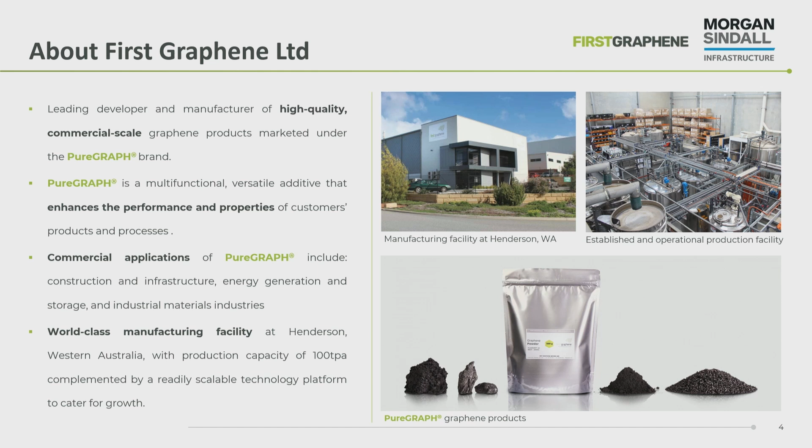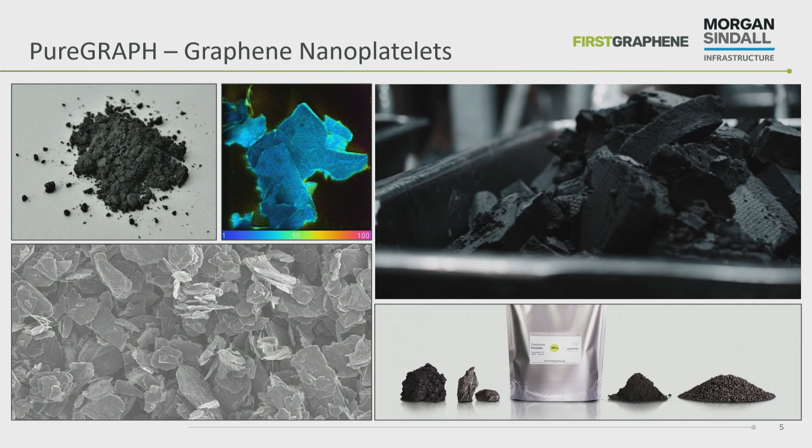It's a microscopic platelet, very, very thin, but with very large aspect ratios. That colored image is just showing you that it's mainly carbon - there's some oxygen functionality on the edges. This is the material that can go into all these applications and give you multiple benefits. That's my R&D manager, Ian, handling the graphene there - you can see we're doing it at a pretty large scale for graphene.

These are some of the benefits. The ones most relevant for cement and concrete are that it's strong, that it's small, and that it can provide a nucleation site during cement hydration, though that's not listed here. It's also a very small nanomaterial, very strong - the tensile strength is very high - and it's totally impenetrable, even to things like hydrogen or helium. It can't pass through it.

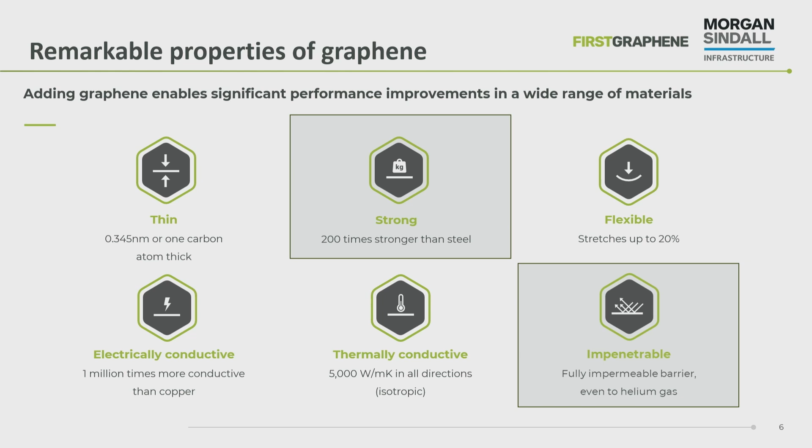That means it's a very good water barrier, a very good ion barrier, and it can impart the properties of graphene - the very high strength - onto the cement matrix. That's what we're really trying to improve in the concrete, the strength of the cement paste - nothing really to do with the aggregates, but just enhancing that cement paste and its cure.

Graphene's been talked about for 20 years now. The Nobel Prize was won in 2010 for graphene. So why are there so few applications where graphene's actually used at scale? This is just to give you a bit of an overview of why it's so difficult.

Graphite is the most thermodynamically favorable form of carbon, so it wants to restack into graphite. All these graphene layers want to restack and form graphite. So when you get graphene and make a product out of it, or sell it like we do in a paste or solid form, it wants to restack like the image on the top left - it wants to form these graphitic lumps, and they're no good, that's useless.

That's just like putting graphite into your mix. There's no point in doing it. If anything, it might make it weaker. The graphite will cleave along those planes, and you'll actually make it weaker.

So we want to make it more like D, where the cement is bonded directly to the platelets. That strength is imparted onto the cement paste, and the tensile strength of the graphene platelets brings a benefit to the hydrated cement.

Doing this is very difficult, and it's difficult to supply a product which is stable. It's a formulation issue, really, that you've got to supply something stable and in those single platelet forms, which is suitable for all applications. And that falls to us, really, as the graphene supplier, to work on these different formulations and make sure our graphene is applicable to whatever end goal we're trying to achieve, whether it's polymers or cement and concrete.

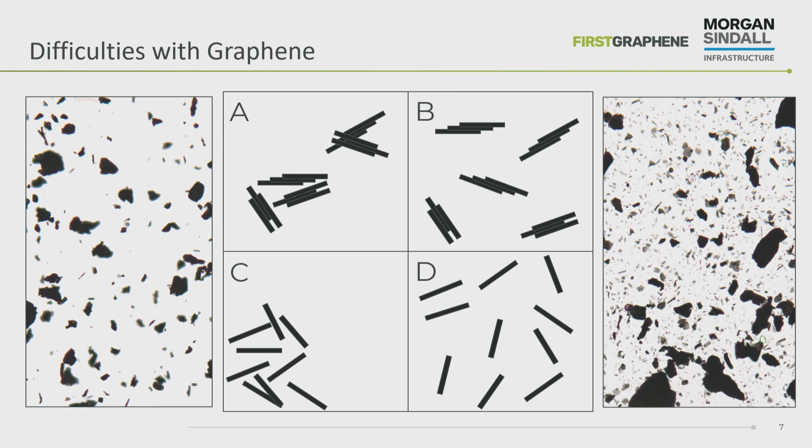The microscope images there on the left and on the right show you the difference between a well-dispersed graphene mixture, which is active, and all those small platelets are active and accessible, and the one on the left, which is all in that graphitic sort of form. There's no free platelets there to bond into and provide you the strength.

So this was the main bulk of the project. This was a Transforming Foundation Industries project. The aim was to try and get graphene into cement and then into a slab. And those are just images of the process there.

So we took our graphene, we mixed it into the grinding aid. Really, that was the key point in the project: how do we get the graphene into the cement plant? Usually when you've got graphene, you need a liquid addition point, so you need to get it well dispersed before it goes into the cement plant.

And there's only really one point to do that. You can put it into the water, which is sprayed into the cement mills, but there's also existing grinding aids which are used inside the mills. So we thought that is really the only point in the cement production process where liquid additives are used. So we need to target that point, get the graphene into that grinding aid, disperse it well, and immediately dose it into the mills.

You can see here that on that middle right image, that's one of the mills at Breedon Cement Plant, and that was our little gazebo there where we did our dispersion process. I'll show you inside the gazebo, there's nothing secret there. So we added that grinding aid, we dispersed it, dosed it straight onto the belt, and it went into the mill.

And from that point on, it was just like a regular cement. So no one down the supply chain had to worry that there was graphene in that cement. They just treated it as normal. There was nothing unusual happening there.

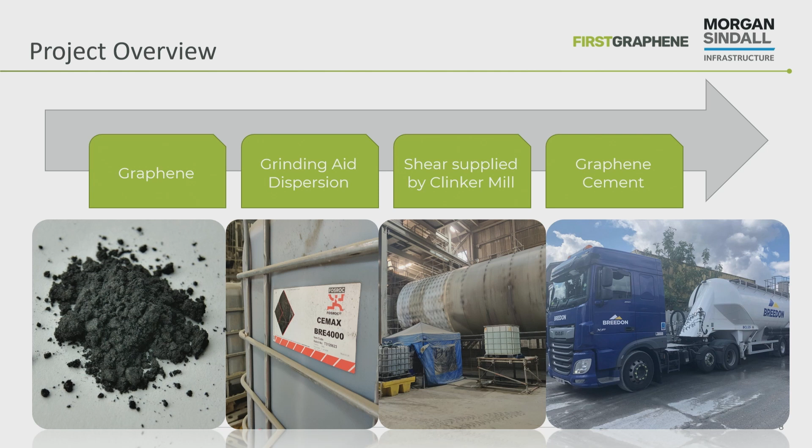So we worked with the University of Manchester. They were looking after the lab activity. They were looking at the CO2 footprint of the cement and of the graphene and of the mixture. They were looking at the health and safety aspects of having a nanomaterial in the cement, something that's not been done before.

Breedon were in charge of the cement production and the logistics and getting it to the batching site, and then Morgan Sindall were in charge of looking after the concrete batching and pouring it into the slab, which you'll see some images of.

So this is the dispersion process. All that effort that goes into getting these platelets active and in that grinding aid went through this process. So we started with our standard graphene powder. We passed it through a high pressure homogenizer, which is used in milk processing or emulsification processes where you want to mix oils and water.

And we passed it through that process, and what that does is it's a very tiny aperture in that mixer, and you apply about 1,000 bars of pressure to it, and as it goes through that tiny aperture, there's huge shear forces in there, and all those graphitic lumps get dispersed, and then you form your nice individual graphene platelets, and they're dispersed into the grinding aid.

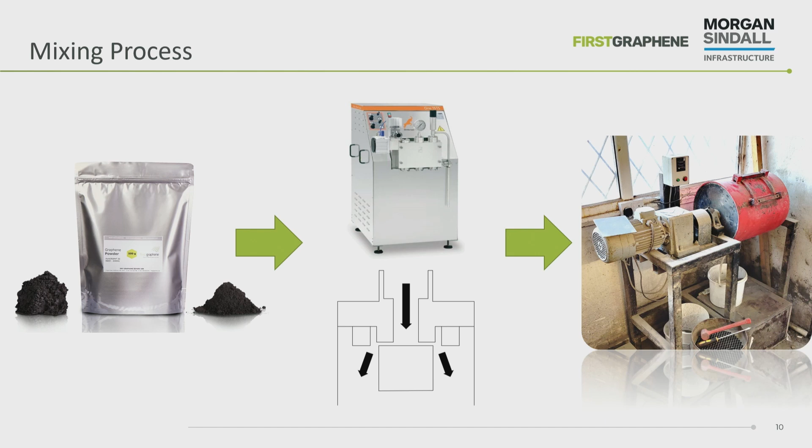We then went on and did lab testing in these small-scale cement mills. So you can see there the grinding aid, that's that black paste there with all the dispersed platelets.

Once you start to disperse the graphene, it has a very high surface area. So even low loadings of graphene in a dispersion will cause it to really increase in viscosity as that surface area is exposed. That's it in there with all the additives, the clinker and the gypsum and the limestone.

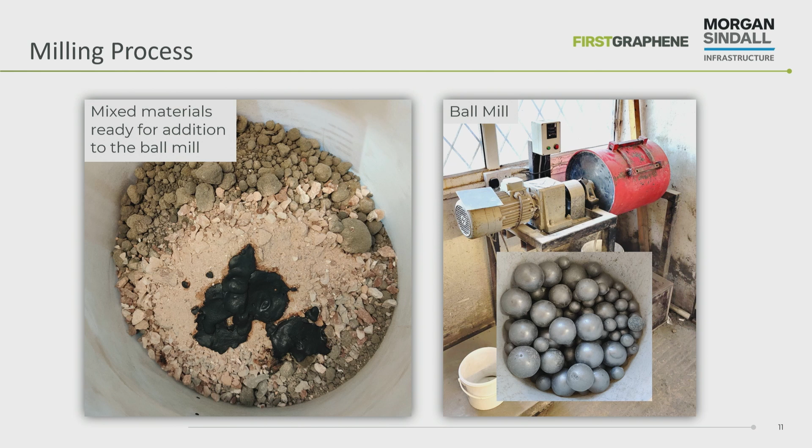We passed it through the ball mills. I won't show you all the data, but there is some, we saw decent trends in the data. So at early ages, you can see here where we're looking at firstly, the graphene loading on the left.

So how can we optimize for graphene loading? You can see it goes up there. So you add graphene, and then it reaches an optimum.

We found this in literature as well with our materials. We've done a lot of work with Australian academics, and they also found that this optimum occurs. So at 0.06, 0.07%, at very low loadings, you start to see a peak in performance.

And then when you add any more graphene, it starts to drop down again. So it could be something to do with the nucleation efficiency of the graphene. It could be something to do with there's too many agglomerates still in there, there's too many graphitic-like particles, and then that causes a decrease. So we always see this hump at very low loadings.

We also looked at the effect of the grinding aid. The grinding aid is just like a liquid, it's very low viscosity, like water. So when we added graphene into that and then dispersed it, the viscosity shot right up.

So we had to add some extra water to get that flowable again, because it had to pass through existing equipment on the Breedon cement plant. That's the one thing we wanted to do, is use as much existing equipment inside the cement plant as possible. So we were doing this dispersion, but then the viscosity shot right up, so we had to add some extra water to keep it flowable.

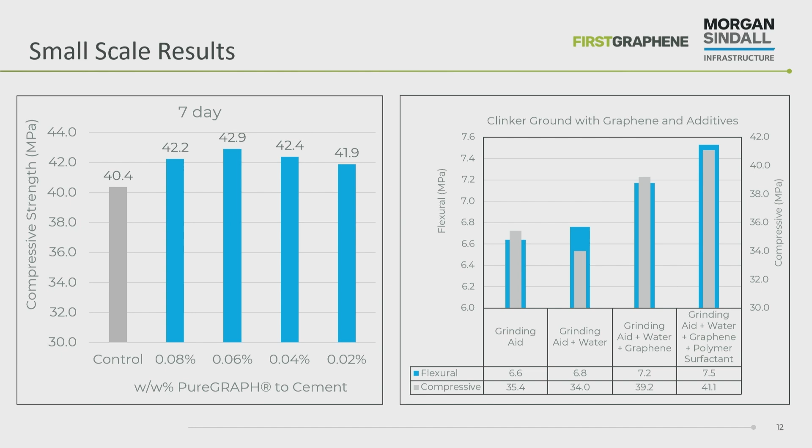So why is there an improvement at all? Really, it's all about, we did some in-depth investigations into the cement paste. So we took graphene and cement and water, and that's it. That's all that's in these samples.

This was just a CEM1, so we wanted to see what the effects of clinker hydration and graphene had on the hydrated area of these images. So we took the cement paste, polished them, infused them with resin, polished them again, and then we get images like this on the right, so very flat cross sections of the cement paste.

You can see here on the images, you've got the unhydrated cement particles, the lighter parts of that image, and then you've got the holes, which are the dark parts, and then you've got this intermediate hydrated area.

We worked with Nick Winters, I don't know if you know him, but he looks at SEM images of cement from cement plants all across the country, and we used his guidance to try and identify what areas were the hydrated areas and monitor them.

So basically we were looking at the improvement in hydration with the graphene addition. With standard CEM1 samples, we were getting about a 69% hydrated area, and then with any sample containing graphene, there was always an improvement in the hydrated area percentage.

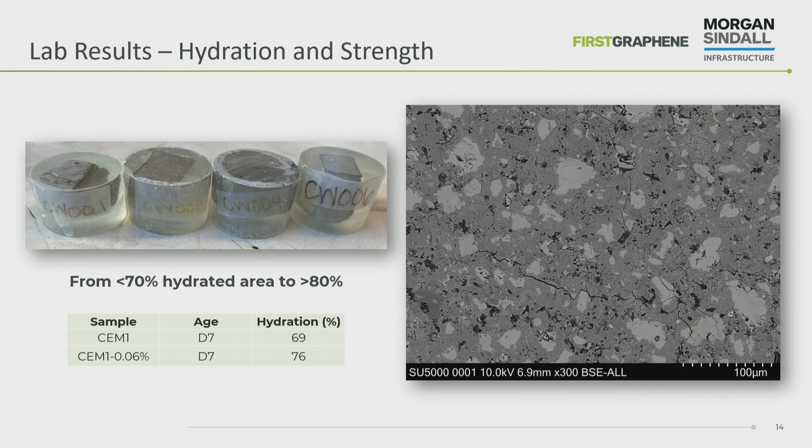So we think that's why there's these improvements in strength. One, because of the nucleation effect, but two, because these nucleations are happening on particles with very high tensile strength. So that's why we think this is happening.

So how does this help us reduce CO2?

So that was the aim of the project. Transforming Foundation Industries is all about looking at cement, concrete, glass making, steel making, and looking to see if we can reduce the CO2 impact of those industries.

So this is what the university did. They did a full life cycle analysis of both processes, the cement production process and our graphene manufacturing process. This is the kilos of CO2 equivalent per ton in each of the products. You can see here, this is published, so it's not a secret, but on Breedon cement it was 775 kilos of CO2, and in our graphene it's 121,000 kilos of CO2 per ton. Obviously that's huge, and this was one of the outcomes of the project, was to identify how much embodied CO2 our graphene had.

Now we've worked on this process, and we've brought that down by about 75% now. This project started about 2 years ago, and the life cycle analysis was one of the first things that was done. So we've already started to optimize our process. Have I put images in here?

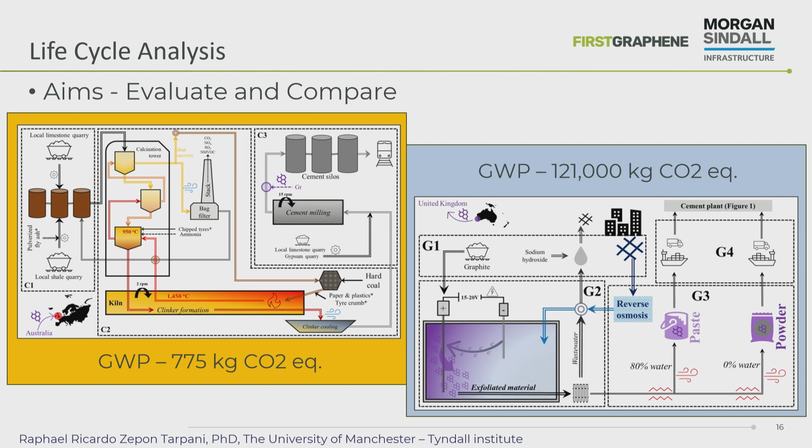No, I've not. But basically, because our site's in Australia, Australia has a very dirty grid, fueled by coal and lignite, so it's the worst place to put an electrochemical exfoliation plant. We can basically move the plant anywhere else in the world and get a much lower CO2 output. Somewhere like France would reduce our CO2 footprint by about 90%. We could also just install solar panels or something like that to reduce our CO2 footprint and then reduce the embodied CO2 of graphene.

So the university also looked at, now we've got this very high CO2 footprint of the graphene and moderate CO2 comparatively of the cement, is there actually a point where you can add graphene and still get a CO2 benefit? So yes, dependent on the strength improvement and the amount of clinker you can reduce in your cement.

So really the target of the project was to produce a CEM2, a limestone cement with a 52.5 N strength class. So it was trying to improve the existing 42.5 N strength class up to 52.5. And then that could start to replace some of the applications where a CEM1 was used.

So really, that's where we're looking at here is we want to try and get a percentage improvement so you can reduce the clinker, add more limestone, and is there an offset? So you can see on some of these lines here, if you get a 10% improvement or a 20% improvement, how much CO2 per ton you can offset with a specific loading of graphene.

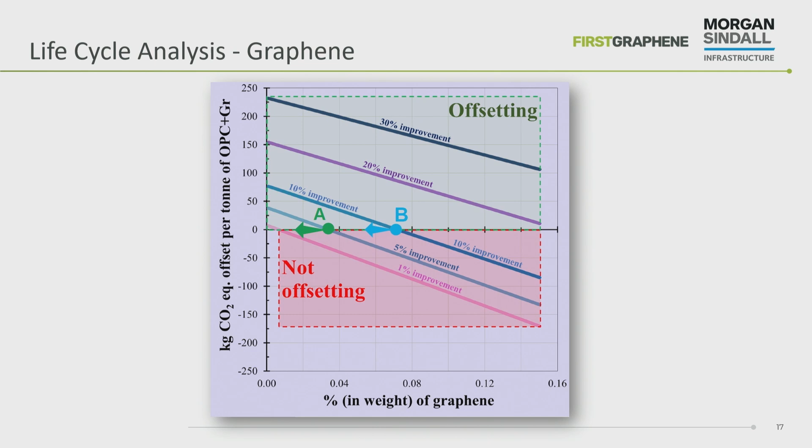So these have changed again since the life cycle analysis was carried out. This is the worst case scenario. If you start to load 0.04, 0.06% of graphene and you get a 10% improvement, you can see that you can still save a few tens of kilos of CO2 per ton, but obviously we've moved on since then, and it's a much more efficient process. So we might have to rerun that life cycle analysis with the university to get this chart to look a little bit better. Oh yeah, that's the electricity demand for our process there.

So you can see there that the Australian grid is just incredibly dirty there. You can see that it's on a par with China.

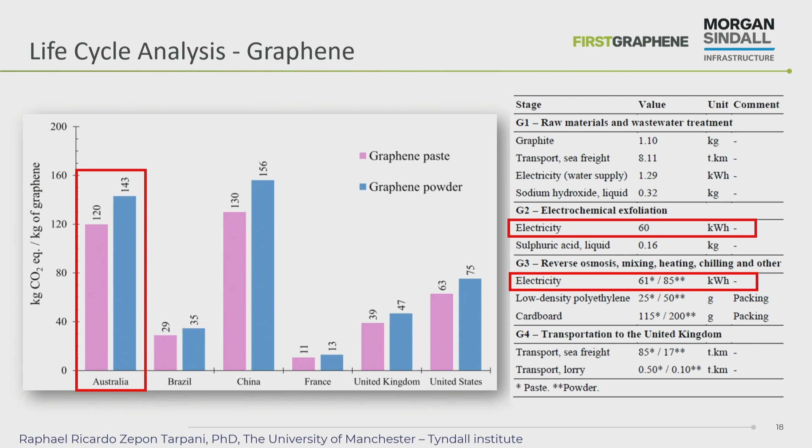So this is the practicalities of what went on, so how we went through the process. We started with, we used Fosroc, so we partnered with Fosroc from a grinding aid point of view and from an admixture point of view. So we found a Fosroc grinding aid which would be suitable for Breedon, so optimized what the chemicals which are in there. Fosroc did that optimization and they provided a grinding aid to Breedon.

That was trialled, so that new grinding aid - this isn't Breedon's existing grinding aid, this was a new grinding aid that was being trialled - so it was supplied in those IBCs, and we tried a few different load-ins, a few different optimizations. This is without the graphene. So we had to do that baseline check to start with and see how the grinding aid performed.

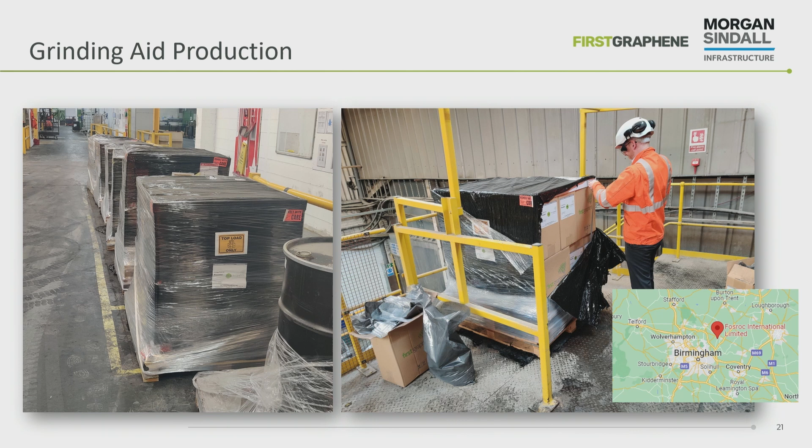Then this is our graphene, so this is the 7 or 8 pallets of graphene which was dispersed into that grinding aid. So that's the pallets on the left of graphene, someone unpacking the pallets there on the right, and that just went into a big tank and it was just loosely mixed. So that was a powder in those boxes, powdered graphene, went into the mixer, and it was just a paddle mixer - again, no high shear, no dispersion, really just mixing it round so that it was in a liquid and it was easy to handle by the pumps.

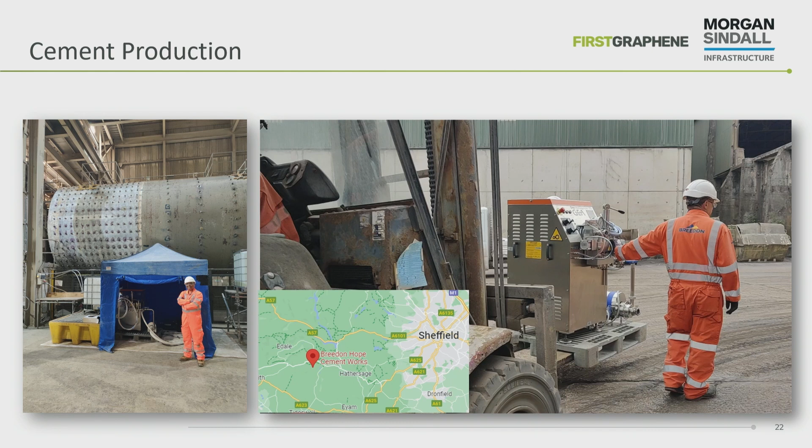Then we used our special mixer, just like we did at the lab scale - this high pressure homogenizer. We set it up in that tent there. We had the IBCs, which had the graphene and the grinding aid not well dispersed, passed it through that high pressure homogenizer to blast apart those graphitic particles into graphene platelets, and that was dosed immediately onto the belt of the cement mill. The grinding aid just goes on top of all the raw materials for the cement mill, and then it's business as usual.

We did some trials, so we took about 20 different samples out. This was running for about 8 hours, and we used a ton of graphene in that trial. That was powdered graphene, so it's very low density, which is why it looks like so much in those pallets - those 7 or 8 pallets there - but it only had about a ton of graphene in it because it's very low density. So we got this data here.

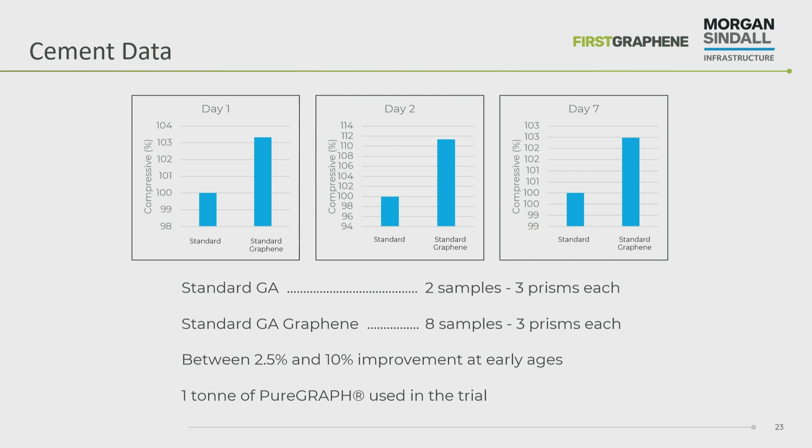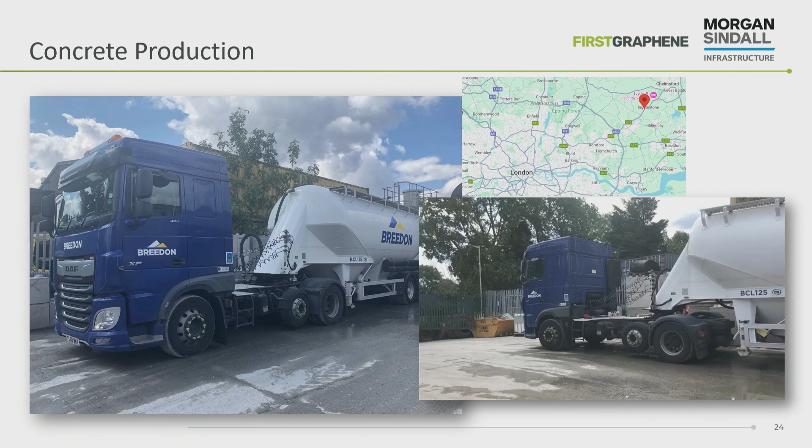After that it just went into tankers. It went to the site in Margaretting, so Morgan Sindall were able to work with the batching company. It went into volumetric trucks - this is the cement being delivered to the batching company, put into volumetric trucks. It went up there to the Margaretting junction of the A12, and that's it being poured into the temporary works there, and we were able to just build that confidence that nothing unusual is going to happen with this concrete.

Yes, it's a new additive, but it is just an additive, just like anything else. It's not anything too high tech. There is a bit of work required on dispersion, but it's not unusual - it's just an additive, just like anything else. And the concrete performed as we would expect.

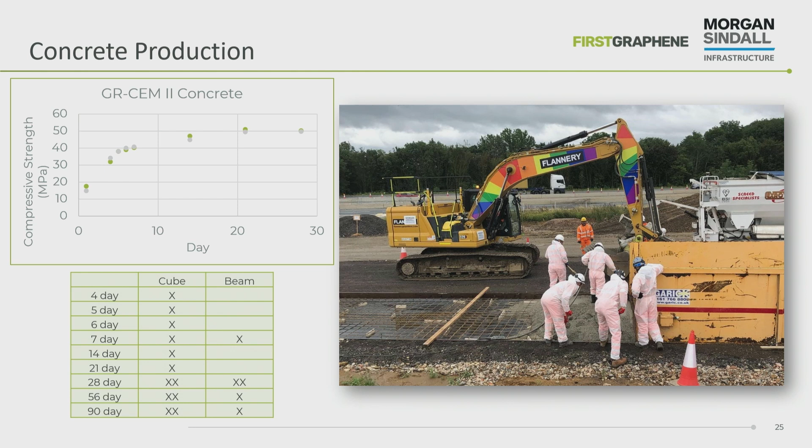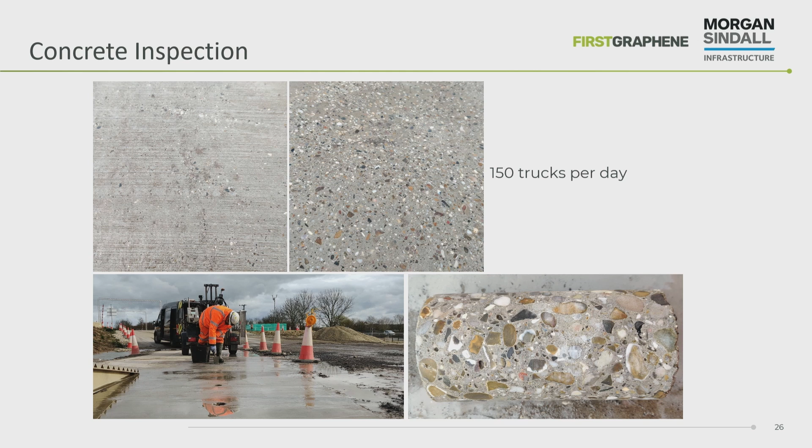The slab we got to visit a few months later. It was cored - you can see there 2 images of the surface, the unworn and the worn surface. It was 150 truck movements a day. This was over a wheel wash - this is a wheel wash slab. So a pretty brutal test scenario for this concrete. And yeah, it performed adequately, just as you would expect. There was nothing unusual happening there. The cores looked fine, the surface looked as worn as you would expect. So yeah, there was nothing unusual there.

Obviously we're moving on, and we're going to do another trial. So this is our new product - we're using the graphene paste this time. We don't need to use this special high-pressure homogenizer. We're going to dose it into the mills using this auger pump, which is much simpler. It doesn't require as many people on site to keep an eye on it, so this is a much more scalable solution.

Obviously we don't sell the pumps or anything, but we just want something that's easy to use and for Breedon to really have minimal input on. Just have a button that says, right, okay, we want to turn on a graphene enhanced batch or not, and just start the auger pump or not, and we just have a silo full of graphene and it'll just flow into that auger pump.

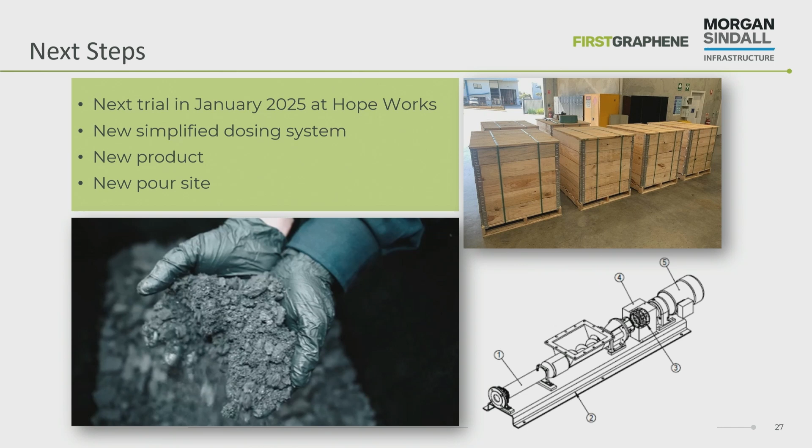We've also got a new pour site. Morgan Sindall are still involved, so there's no more funding for this project, but everyone's still working together on this, which is really good - that's what you want. You don't want a project to run for 2 years and then just end when the money runs out. It's really started something here, so we're going to run another trial with no funding. We'll work out ourselves how we get that done. But yeah, that graphene's now on the water, so we're ready to go for this new pour site and for this new graphene enhanced cement.

I think that's everything. Yeah, that's it all. So thanks very much. Yeah, no, it's no problem.

Any questions to present to Michael, please? You've stunned them, that's all right - the excitement of it all.

It's all good. But this is exciting, that there's this whole new process, whole new cements coming out, and led by Michael's presentation and the other two to follow. I keep feeling a Star Trek theme coming, to boldly go. So thank you, Michael.